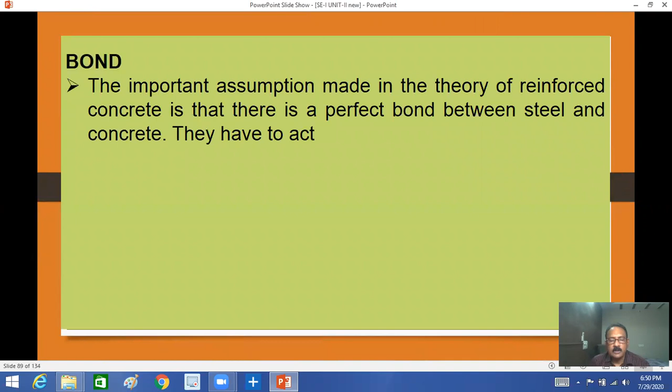What is bond? Basically, in previous videos, we observed the important assumption in reinforced concrete. This theory depends upon the assumption that there is a good bond, a perfect bond, between steel and concrete. They act together without any slip. So this is a perfect bond between steel and concrete. This is our initial, first assumption: there is a good bond.

Due to bond only, the force will transfer to the steel from the surrounding concrete, and to concrete from steel. Suppose a load is acting on a beam; the load will transfer to the reinforcement through the concrete. Similarly from steel to concrete, because there is a good bond. Due to bond only, the force will transfer to the steel from the concrete and to concrete from steel.

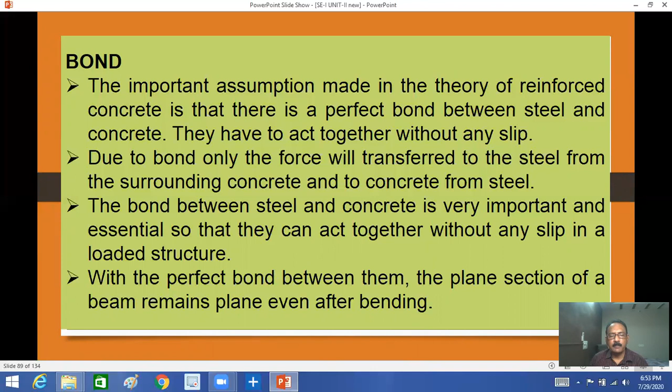Why does the plane remain plane even after bending? After applying load, whenever a beam is subjected to moment loads, the plane cross section remains the same. Suppose beam width B, AB, those are the same even after bending, because with the perfect bond between them, the plane section of a beam remains plane even after bending. So this is the bond.

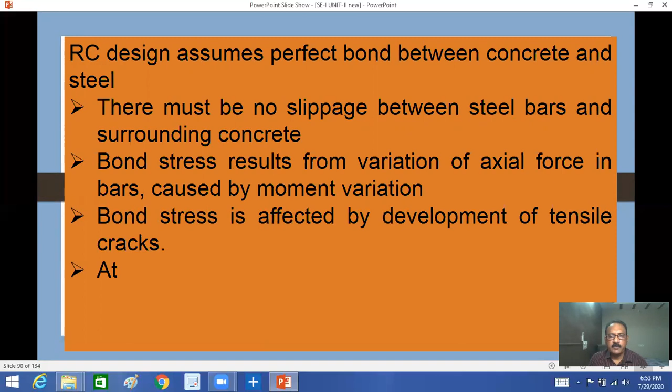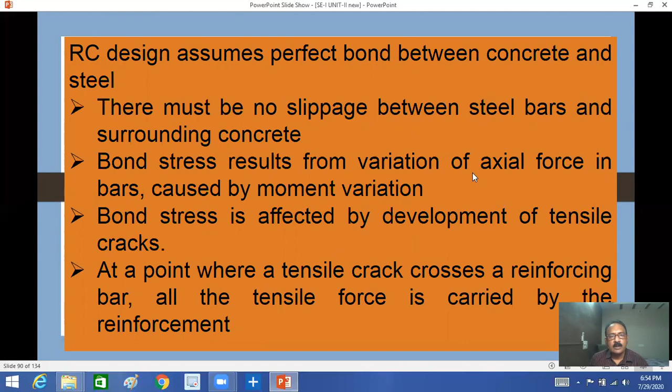RCC design assumes perfect bond between concrete and steel. There is no slip between steel bars and surrounding concrete. Bond stress results from variation of axial force in the bars caused by moment variation. Bond stress is affected by development of tensile cracks. At the point where a tensile crack crosses a reinforcing bar, all the tensile force is carried by the tensile reinforcement. These are assumptions of the RCC.

And what is the mechanism of bond transfer? I will show some figures. Bond between concrete and steel bar is due to chemical adhesion, friction, and bearing of reinforcement ribs on the concrete. Adhesion and friction are lost when the bar is loaded in tension as a result of diameter reduction due to Poisson's ratio effect. So this is the mechanism of bond transfer.

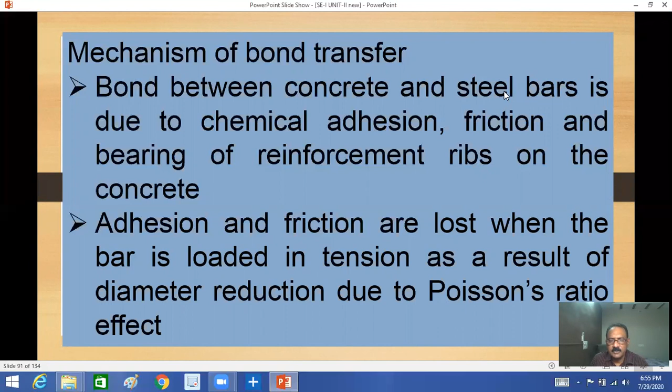Bond between concrete and steel bars is due to chemical adhesion and friction between the steel reinforcement bar and concrete, and bearing of reinforcement ribs on the concrete. Adhesion and friction are lost when the bar is loaded in tension. So this is the mechanism of transfer of load.

Bond is transferred mainly by bearing of the deformed bars. Instead of plain bars, now we always use deformed bars in main structures. Plain bars have poor bond transfer and are no longer used. Steel bars subjected to axial compression develop a better bond because of the Poisson's ratio effect. Plain bars have a poor bond transfer and are no longer used.

That's why generally we are using deformed bars. If you see this figure, how is this deformed? This will be concrete. This is a deformed form. I will show you what is deformed. If you observe a steel bar like this, curves will be there. So concrete will go in the curves and there is a good bond between concrete and deformed steel.

With a bare plain bar, there is no strong bond like this. So sometimes we have this type of reinforced bars with ribs. Sometimes you will use plain bars, but we'll always use deformed bars instead of plain bars because there is a good bond between the deformed steel bars and concrete.

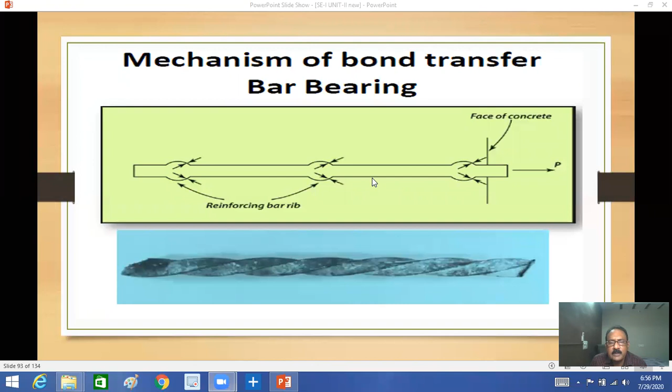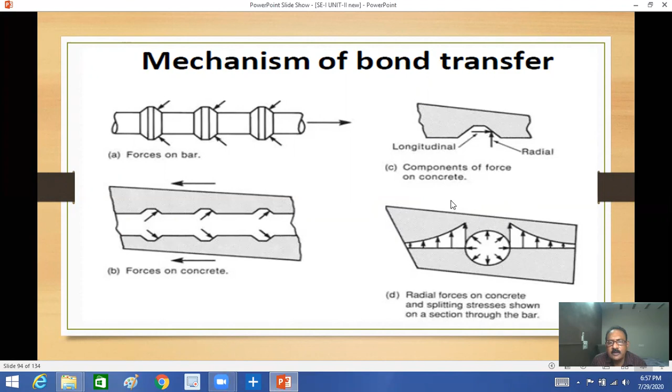Okay. Now this is the mechanism of bond transfer. For plain bars, there is no good bond. Whenever force applies like this, these ribs will not allow it to slip. This is the longitudinal component of force on the concrete, and these are radial forces acting. This is the mechanism of bond transfer.

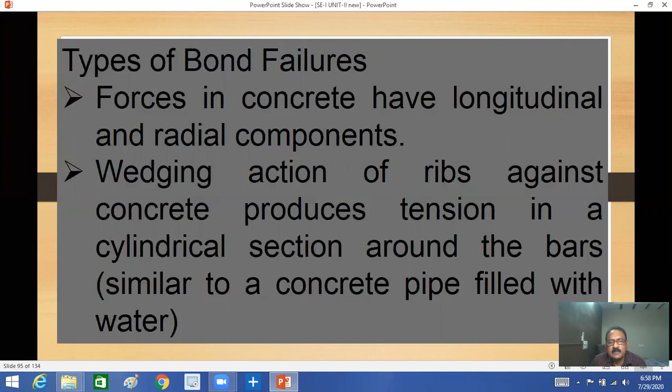What are the types of bond failures? Forces in concrete have longitudinal and radial components. Wedging action of ribs against concrete produces tension in a cylindrical section around the bars, similar to a concrete pipe filled with water. So these are the types.

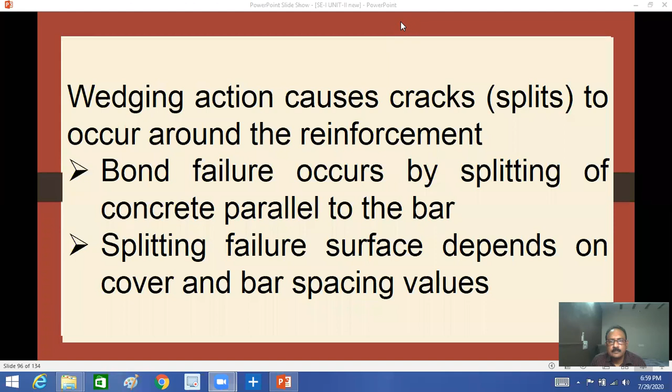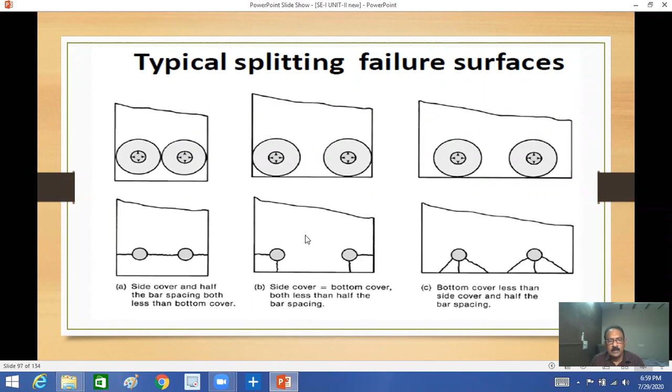Next we'll see these types of splitting failures. If the side cover or bottom cover is not sufficient, the failure occurs as shown in the figures. This is a typical splitting failure surface.

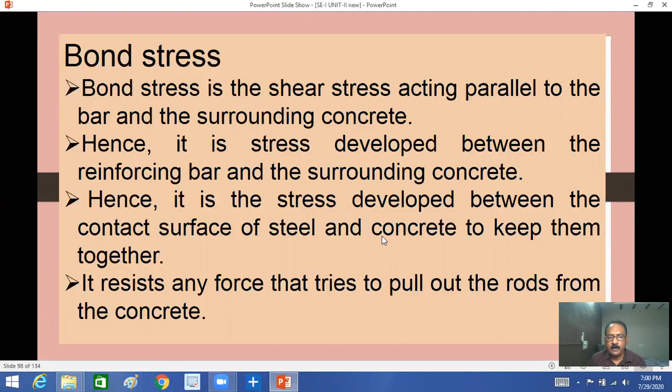How will bond stress develop? Bond stress is the shear stress acting parallel to the bar and the surrounding concrete. Hence, it is the stress developed between the reinforcing bar and the surrounding concrete, at the contact surface of steel and concrete, to keep them together. It resists any force that tries to pull out the rods from the concrete. This is a very important point: bond stress opposes pulling of rods.

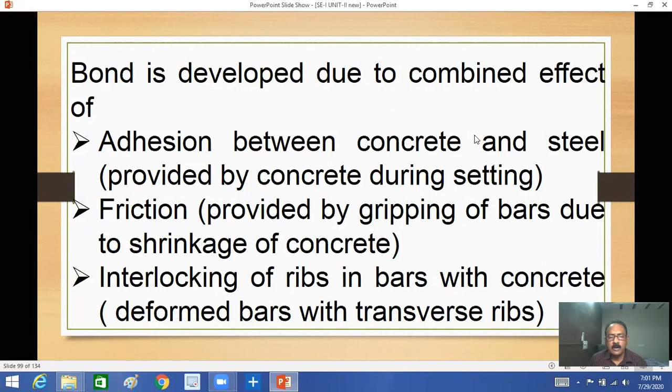Bond is developed due to the combined effect of adhesion between concrete and steel during setting time, friction, and interlocking of ribs of deformed bars with transverse ribs with concrete. Because of these deformed bars, interlocking of ribs with concrete will give you good bond.

Bond stress depends upon the grade of concrete, the diameter of the bar, bar profile condition, nature of the force on the bar, grouping of the bars, and bends and hooks of the bar. So bond stress depends upon these parameters. These values are given in IS 456:2000 for plain bars.